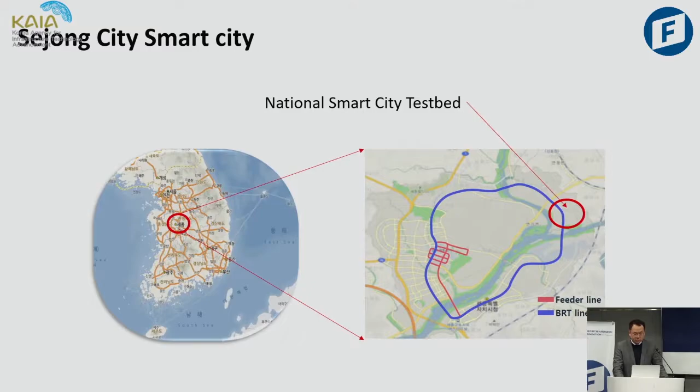And the National Smart City Testbed, you can see on the right figure, it's just one district, marked in the circle. This area is where we're going to build a new city. The city will look like this.

The total project cost will be around $30 billion, and the construction period from next year will be about 5 years. We're going to start operation from the year 2021 to 2036, and the business will be done by the O1 consortium, led by LGCNS.

In this area, we're going to propose 5 mobility services. The first is personal mobility, using electric kickboards and bike systems. Then we will introduce shared mobility, autonomous shuttles, and demand responsive transits. One more is smart parking.

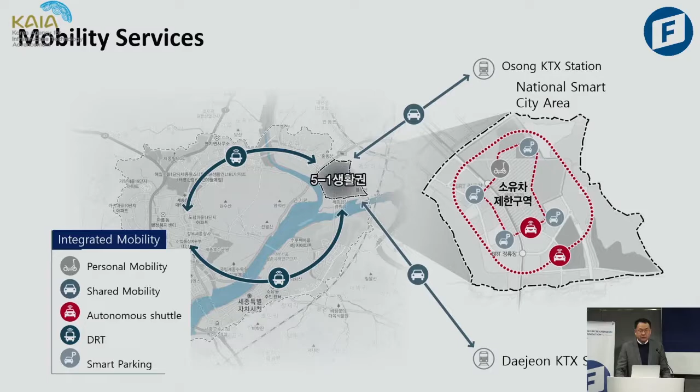In the 5-1 district, this is the smart city testbed area. Based on this area, we're going to plan the city transportation systems, and later we're going to expand the experiment to the whole Sejong City.

At the core of our effort, we have O1 Link. This is implementation of the MaaS concept - I think European people are very familiar with this, mobility as a service. Using just one single application like O1 Link, you can reserve, pay, and plan your trips. This will provide multimodal services to everybody, from the 5-1 testbed locations.

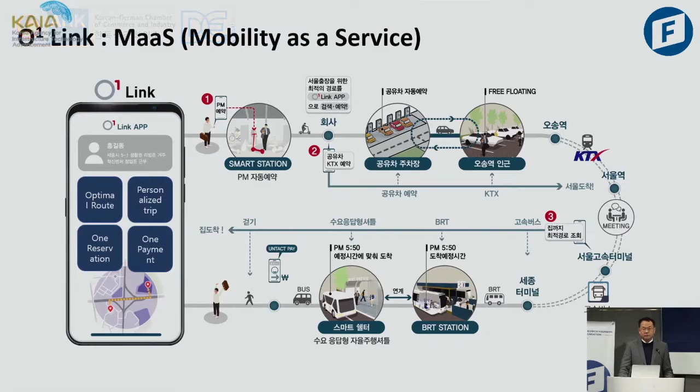And one good thing is that this O1 Link, we're going to open this platform to everybody. Meaning that if we are running a business and want to do more mobility services, you can also use O1 Link so you can join our network.

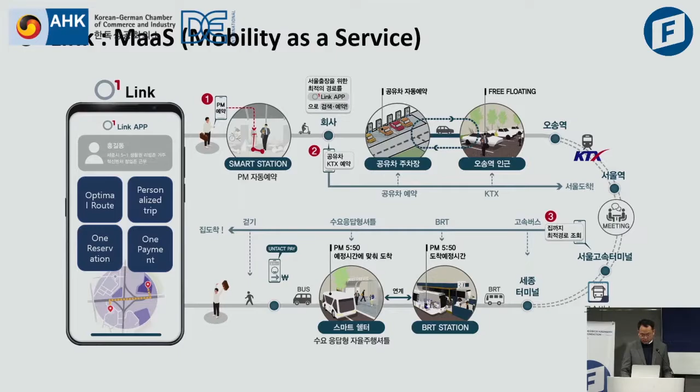Under the O1 Link apps, we're going to build the O1 Mobility Brain. This is kind of a system that optimizes transportation and mobilities using AI, cloud, and big data. I think this O1 Mobility Brain is the core concept of O1 Link and this smart city.

So we're going to implement a mobility simulator to find the optimal travel, and also we're going to predict future demand and future traffic, and provide these services to the people.

Using O1 Link, you can plan your intra-city travel using the 5 mobility services, and also these services will be combined and integrated with the existing services in Sejong City, like the BRT, bus rapid transit, bus systems, and taxis.

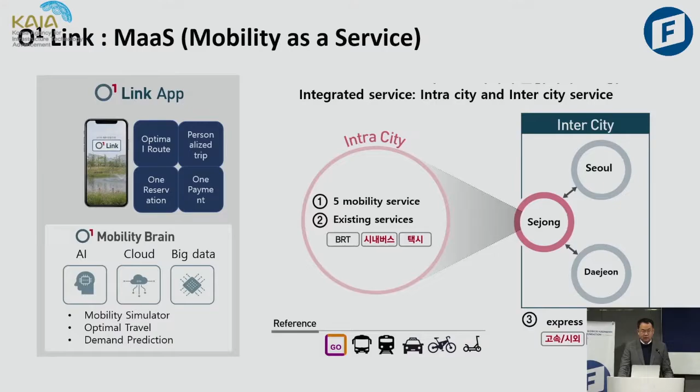And also this will support intercity travel. So if you want to go to distant cities like Seoul and Daejeon, you can still use O1 Link. Just one click and one app, and you can reserve everything.

And for personal mobility, we already have some personal mobility operated - we have bikes, kickboards, and micro mobilities. To improve the safety of the micro mobilities, we're going to build a personal mobility roadway, separated from the pedestrian way, where bikes and kickboards can be used.

And for convenience, we're going to use a wireless charging system, and we hope that all the energies for the electric bike and electric kickboard can be provided by solar energy. What we aim for is that 40% of the total energy demand inside this testbed city can be provided by solar energy.

And to connect to the vicinity area - actually in South Korea, Uber-like service is prohibited, it's illegal. So we want to have a slightly different type of shared mobility. We're going to use rental car services.

Around this area, we have 5,000 rental cars available. Using these rental cars, we're going to connect them with O1 Link, and then the people living in this testbed city can go to the vicinity area using these rental services.

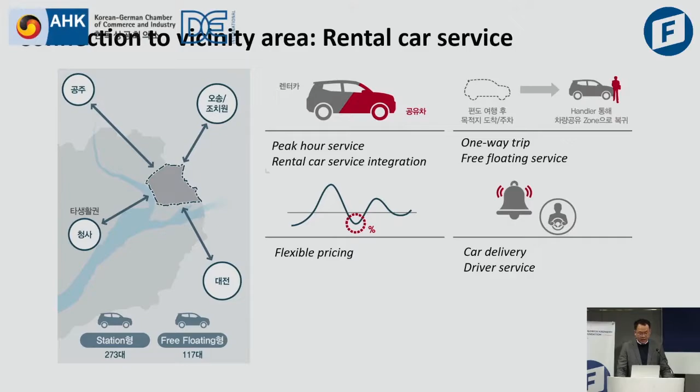And also we're going to have more services like car delivery and driver services, and we are making flexible pricing strategies. We have two types of these services: the station type, meaning you can go to the station and get these services, and the free floating type, meaning you have to find the vehicles using the O1 Link app, then you can leave your vehicle anywhere, and the handler will handle it.

And there is one more thing: the autonomous shuttle services. Inside this area, we are planning two autonomous-only lanes, and around these lanes we're going to first run the shuttle services.

This area will be connected by the C-ITS services from the national government, using infrastructure-to-vehicle communications so vehicles can get more information from the infrastructure. Along this roadway, we're going to install many sensors.

We are designing a smart pole, which is a kind of sensor combination using CCTV cameras, and LiDAR or radar if needed. That information will be delivered to the driver or vehicle so they can avoid dangerous situations like collisions.

For security purposes, we're going to use blockchain-based security. We will also make a smart shelter bus station, which is an O1-link accessible point. So if you just go to these bus stations, even without any apps, you can reserve and get the service.

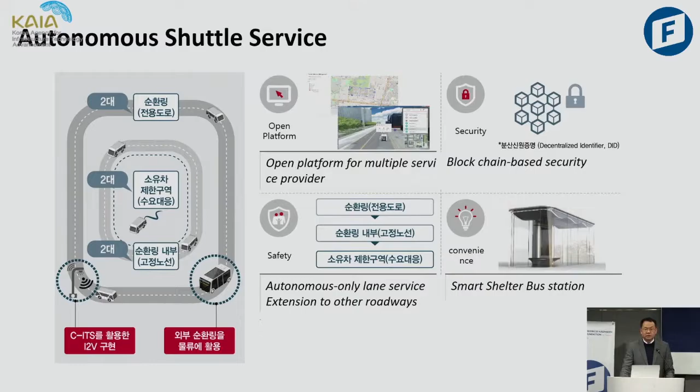These autonomous-only lane services will later be extended to the whole city, because safety is not yet guaranteed. We're going to do more experiments one by one, and once we have enough reliability, we'll extend these services to other roadways.

We think one of the killer applications of mobility services is demand responsive transit. This means you call the transit service, it picks you up, and delivers you to the location you want.

We have two types of services: fixed stop-based and floating stop-based. With fixed stop services, you have to go to a fixed stop location. But with floating stop-based services, you can call from anywhere and be dropped anywhere.

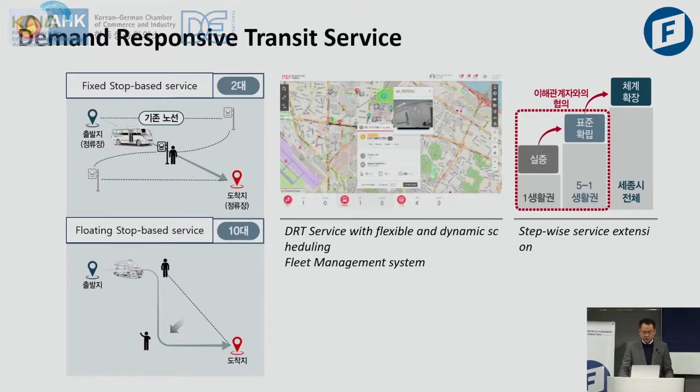Initially we are starting with 12 vehicles, but later, after analyzing demand and mobility situations, we're going to increase this number so we can provide services to the whole of Sejong City.

The last one is the mobility hub station. These will be located around the city. You can see the red dots and blue dots are the locations for the O1 mobility hub stations.

If you just go to these mobility hub stations, you can get every type of service, like bikes, PM, shared mobility, DRT, EV charging, more convenience facilities, and also robot parking.

This kind of hub station will be installed in parking facilities, and some of these parking facilities will be underground.

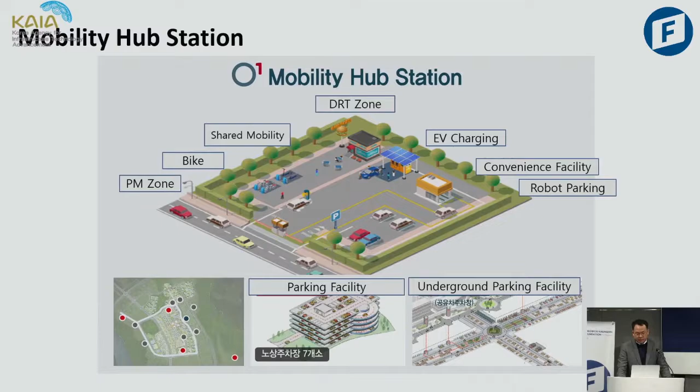Up to now, we are just starting with 5 mobility services, but later we're going to extend these to more advanced future mobility services, like autonomous taxis, drone taxis, UAM, and unmanned trams. These will also be tested in Sejong City later.

So up to now, I have shown you some services we are planning for the Sejong Smart City Testbed. But the question is: this kind of service is just like what every city is talking about. So what is the difference, and what is the implementation strategy?

To look at this, we have to rethink what smart city means. People talk about IT, data, and information as the smart thing, but I do not agree with that idea. I think smart means better decision-making or optimization. But what about the city?

City is what? There might be different understandings of the city—living, lifestyle, history can all be included. But from a management or engineering concept, I define the city as a system with many infrastructures. So what is smart city to engineers? I think it's a decision-making system for urban infrastructure systems.

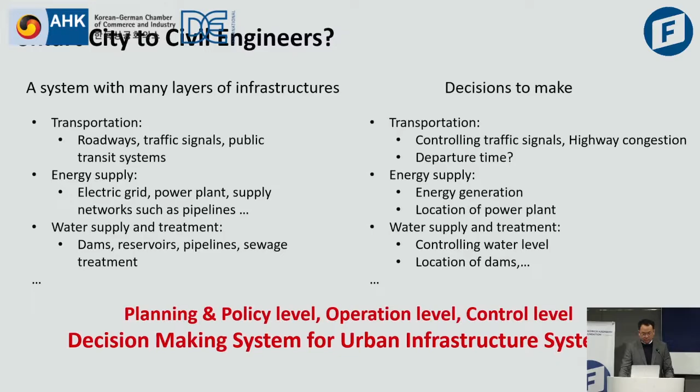So we have to make a better decision for the planning level, the policy level, the operation level, and at the very detailed control level. So this is my understanding on the smart city.

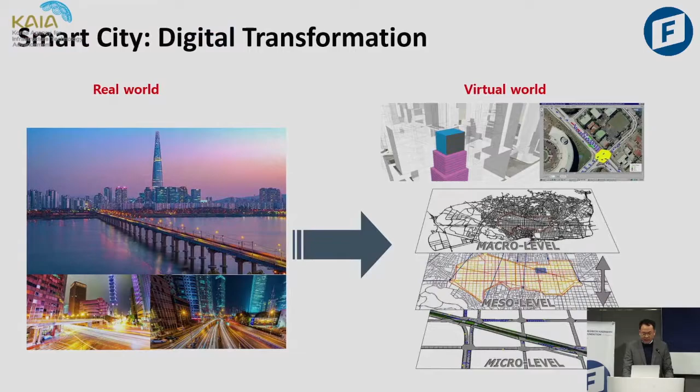To implement this idea, I think that we have to build a digital twin. We want to make a copy of the digital version of our city. So from the real world, we have to make maps and we have to make some behavior models. But the problem is how we can implement the digital twin?

To make the digital twin, before we go into the implementation, we have to talk about strategy. What kind of strategy we're going to use for infrastructure management? Up to now, infrastructure management strategies have evolved from reactive management to proactive and predictive. In the future, automated maintenance will be the future theme. But right now, what you have to focus on is predictive maintenance or predictive management.

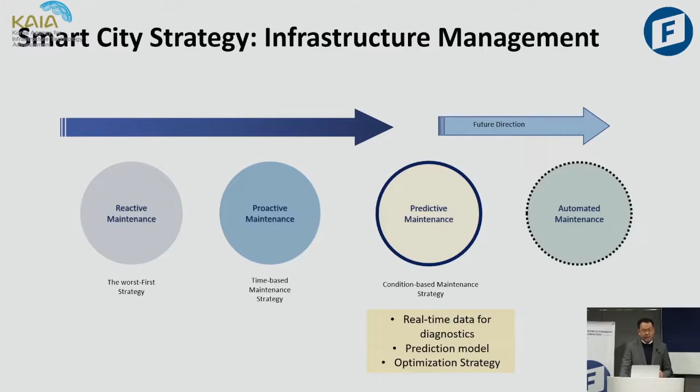In the predictive management strategy, we can use real-time data for diagnostics of our infrastructure system. We have to know the exact state of our infrastructures or our services. Then we have to build some prediction model. Based on the prediction model and diagnostics, we have to set up an optimization strategy to provide the best service. To implement those kinds of ideas, we're going to design the mobility brain.

Up to now, so many digital twins are focusing on building the data hub. But the smart city is not just a data hub. So how can we make a really good decision using this kind of data? We think that we need more functions and procedures.

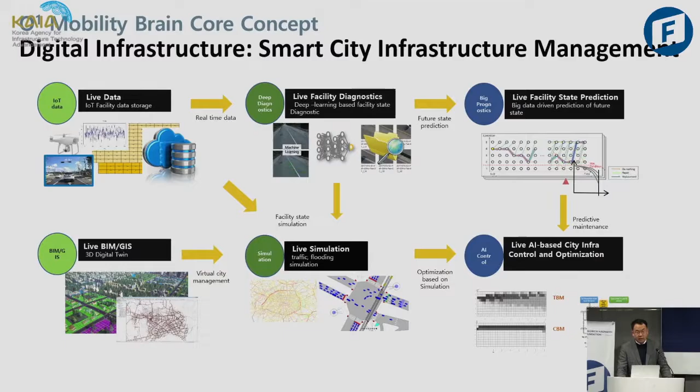So I think that live simulation will be the core of this digital twin concept. Using these prediction technologies and the data-driven approaches, we have to combine those together to get the optimal control and optimizations. To implement this kind of idea, we can think about some examples.

So we're going to start from the sensing. In these O1 cities, I think we're going to make some kind of surveillance system of the traffic. You can see that we want to track all the vehicles inside the cities, not just the vehicle movement. So we want to extract the origin and destination locations of all vehicles.

And then we're going to make some kind of surveillance for the pedestrians. We want to know the crossing intention of the pedestrian so that we can avoid collisions. So this kind of system is the basic one.

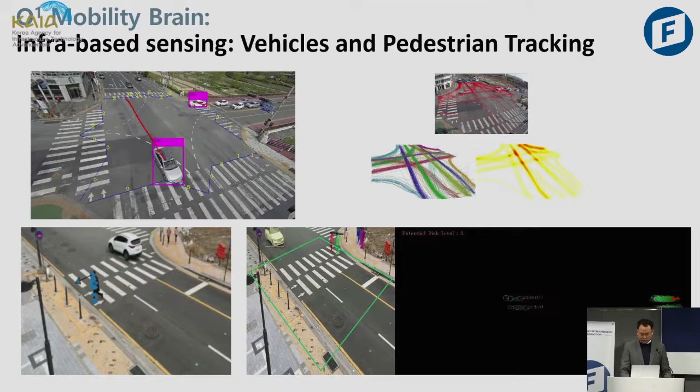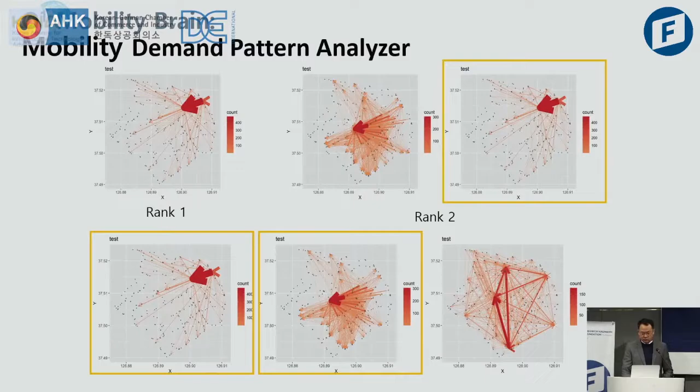Using this surveillance system, we want to get the whole mobility data. And using that kind of information, we can implement some mobility demand pattern analyzers. We can stratify some demand into several ranks, so we can extract some very crucial demand for the services. This information will be used for the DRT route services.

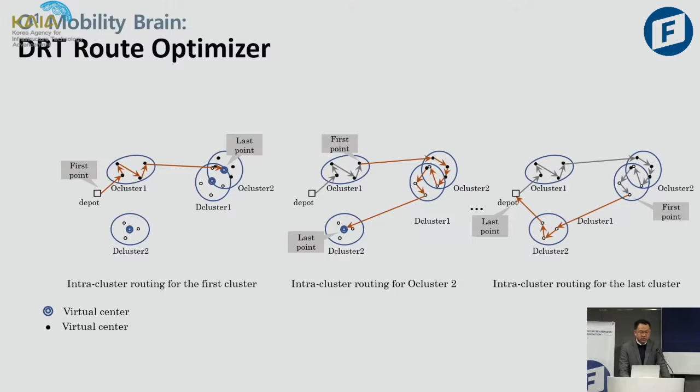And this information, we are using the DRT route optimizers. So in real time, we are observing people's movement and traffic data, and then we make real-time route optimizers. Also, at the core of the digital twin, we want to build a cloud-based mobility simulator.

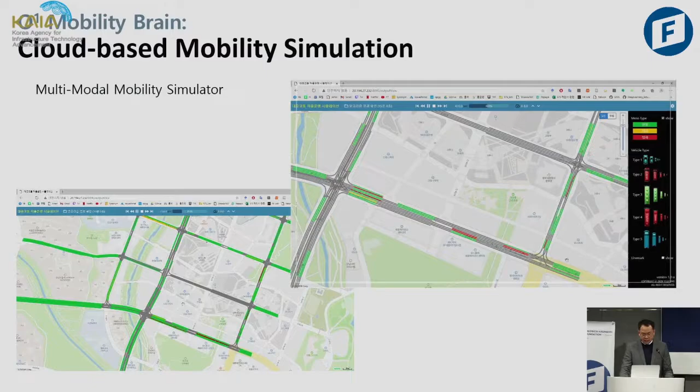Now this is the example of Sejong City. You can see we are already building some HD maps, high definition maps, for the autonomous vehicles in Sejong City, and we are making some simulations.

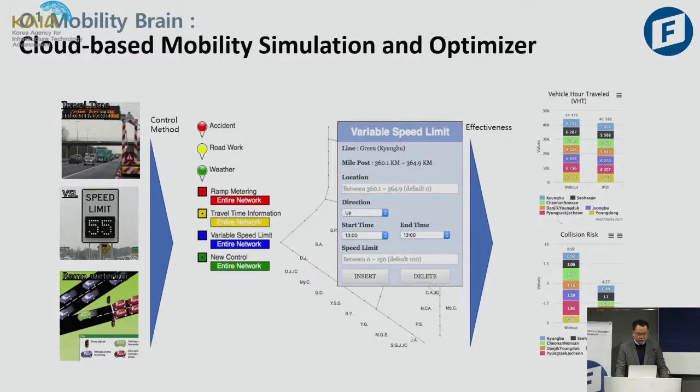Using these simulations, we can make a much better route optimized result. This kind of mobility engine can predict and control the infrastructure system. For example, if we want to set variable speed limits, and there's an accident, road work, or weather situation, the simulator will give the best result for what action to take for control of the roadway.

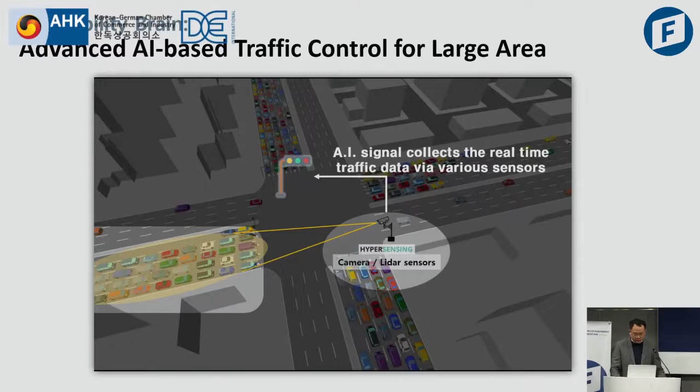Next is the advanced AI traffic control for larger areas. Using the surveillance system, we are observing all the vehicles, and the AI optimizer is calculating the best option for signal control.

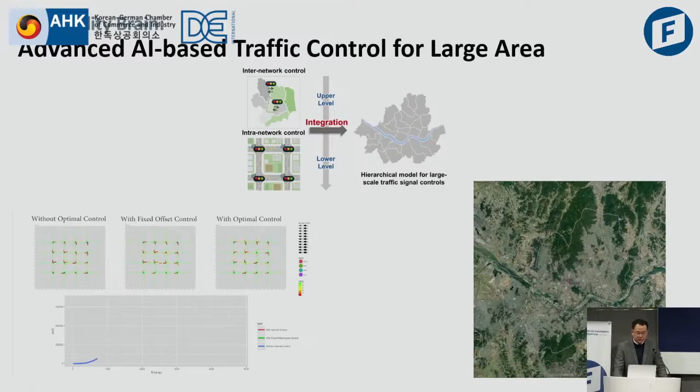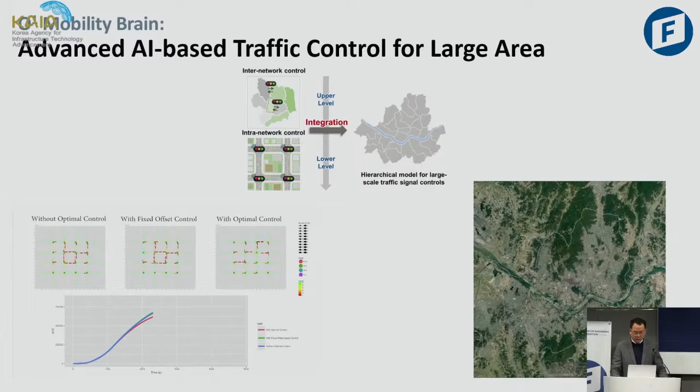But this kind of signal control will not just be a simple single intersection signal control. We're going to use a little bit higher level strategy, the bi-level strategy, meaning we divide the city networks into several sub-networks. For these sub-networks, we optimize the interflow between sub-networks and optimize the intra-network signals.

As you can see, we can reduce huge congestion using AI and this approach. We think we can reduce the very severe congestion in metropolitan areas using this approach.

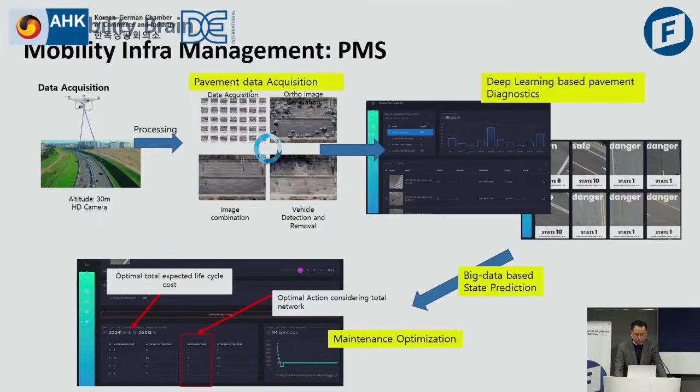The computer will know whether the road area is dangerous or not. If there are potholes or cracks or any hazard to vehicles, it will detect it. Later, using this big data, we can do state prediction and give maintenance optimization, meaning this will be implemented as an order for the maintenance workers.

Okay, this is the end of my presentation. I think Sejong City is a citywide living lab, so we're going to do a lot of experiments here. What I pursue is an open platform for business, so everybody who wants to join, I hope you can join this. You can just send me emails, and this is open for all types of collaboration.

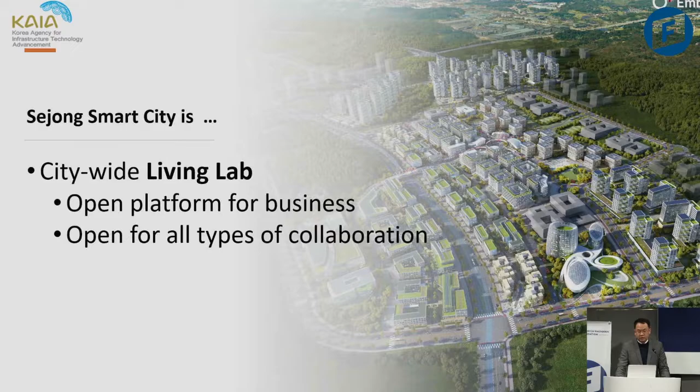We're going to build a smart city research center inside this region, and some universities and research institutes will join this project. This can be a really good opportunity for Korea and Germany collaboration for the smart city. Dankeschön.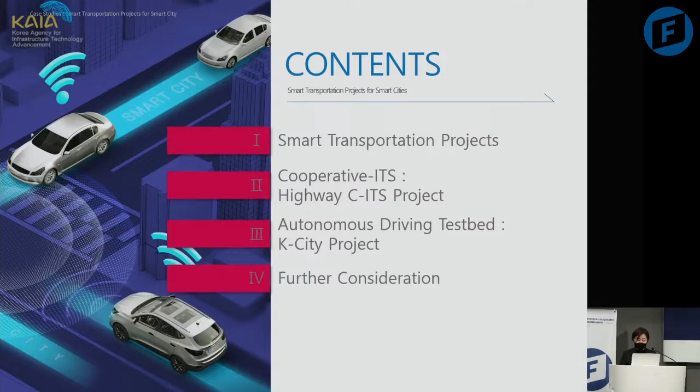Here is a brief summary of my presentation. First, I would discuss several types of smart transportation projects. Second, I would like to introduce one C-ITS project which I already completed as a project manager. Next comes the K-City project, which is a testbed to evaluate automated car scenarios. Finally, I would like to conclude with further considerations.

As for the smart transportation project, I'd like to discuss the key factors between several types of projects. Here are the projects I wanted to introduce today. Those are the relevant projects which are already done or still ongoing.

So firstly, look at the left side of this project: the K-City Testbed, already completed in 2018, and the Highway C-ITS project, done in 2019. And we are implementing the Daegu Testbed in 2020.

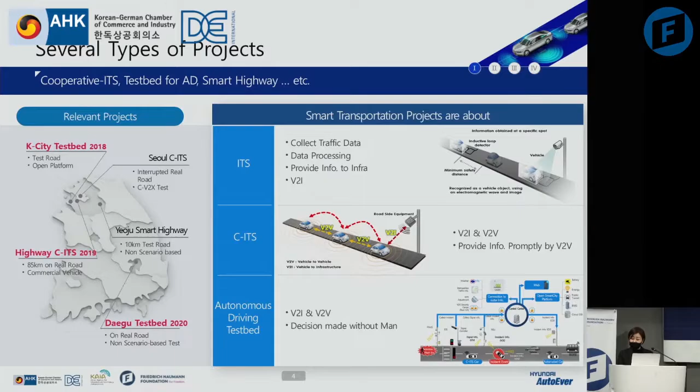So let's talk about what the smart transportation project is about. You're already aware of the ITS project, which has already been implemented over the last 20 years. So what is the difference between ITS and C-ITS? The key factor is V2V, vehicle-to-vehicle communication. And also the last thing is the autonomous driving testbed, which is decision made without a driver.

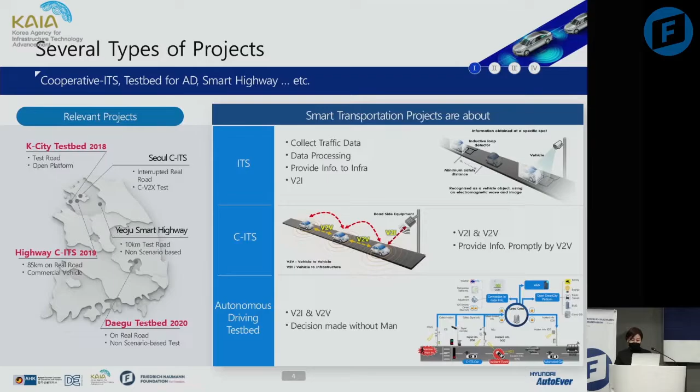Now I'd like to show that first case study, the highway CITS test project. This project was led by KEC, Korea Expressway Corporation.

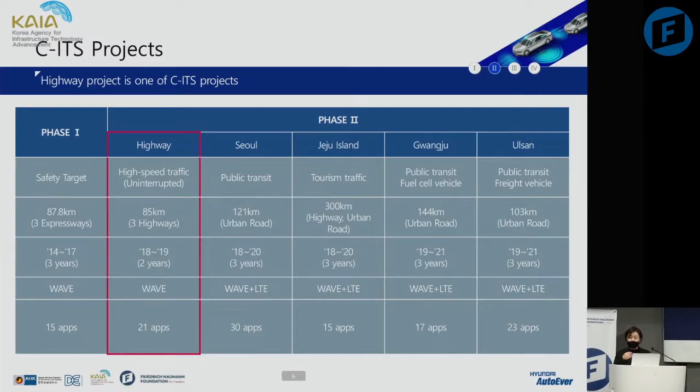Here are similar projects which are already done or still ongoing. First, we categorized those CITS projects into 2 phases. The first phase is Sejong CITS project, and the second is highway CITS project which was already done by Hyundai. Seoul, Jeju, Gwangju and Ulsan, the 4 metropolitan cities, are implementing this CITS project now and it's still ongoing. My company and my project team are joining that Gwangju project as well.

As project manager, I have completed this project over 1 year. Let me introduce a brief summary of this project. Project scope is 85.4 kilometers total length over a 1 year period.

It also adopted WAVE network to communicate with 90 RSU and 700 OBU. It has 17 incident detection systems to give dangerous information to drivers, as well as a parking information system and a center system with hardware and software.

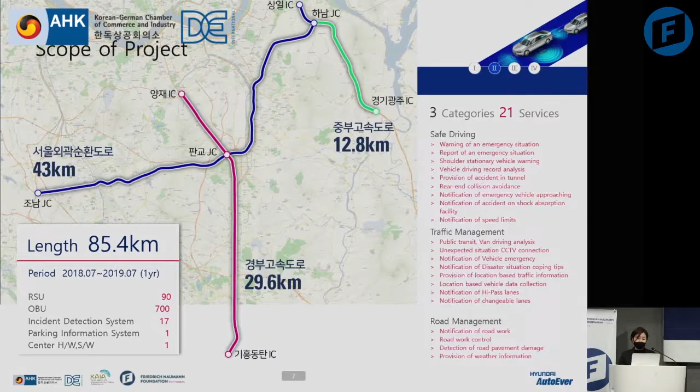This project specially collaborated and combined 2 different systems: the previous ITS legacy system in KEC, and our new system. It was really hard work, but we made it.

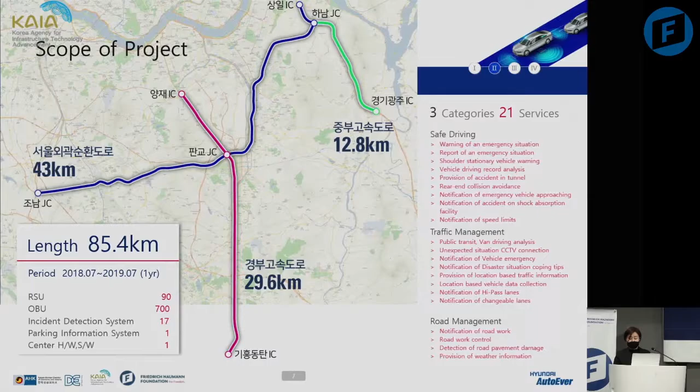This is a brief summary of our services. There are 21 services in 3 categories: safety, traffic management, and road management. The red color means critical information for driving and safety. We implemented 9 services first, plus green and blue services.

It doesn't look like a mandatory service. However, if you get information on road conditions and different event cases, it helps your driving.

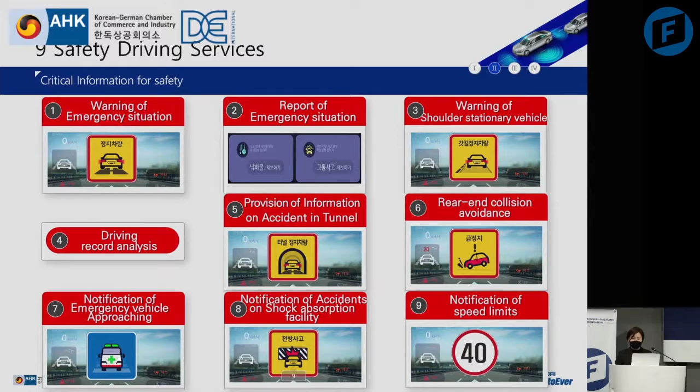I will not go into detail on these 9 safety driving services, since you already know those. There are also 8 traffic management services and 4 road management services as well.

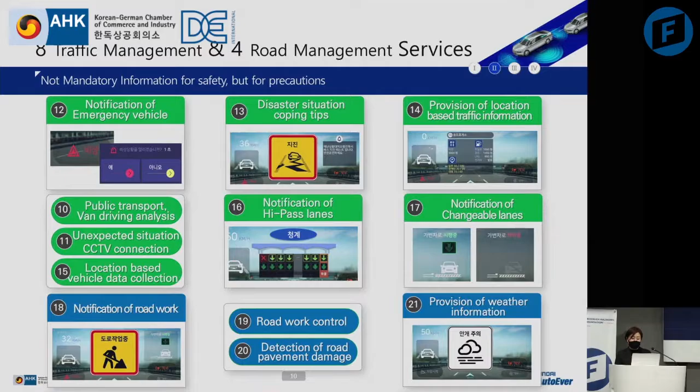We especially have 4 different types of tunnels and 3 different types of high-pass toll gates, and a lot of different events were happening on this road.

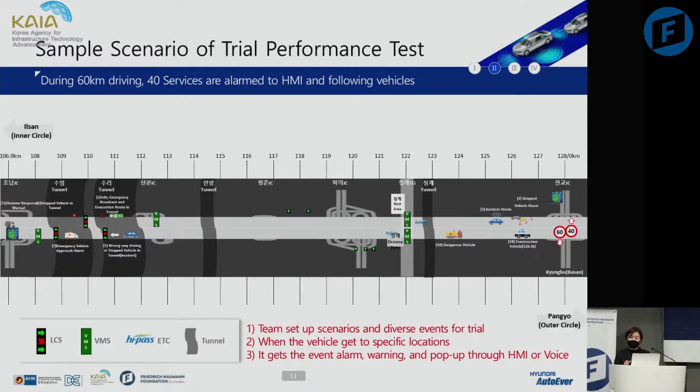This is a sample scenario of the trial performance test. After the project, our team set up scenarios and diverse events for trial. When the vehicle reaches specific locations, it gets event alarms, warnings, and pop-up messages through HMI and voice.

Here are the expectations for this project. In terms of accident prevention, we can expect drivers' compliance to increase by almost 50% compared to without information. Accident prevention could be expected to yield a benefit of $0.8 million.

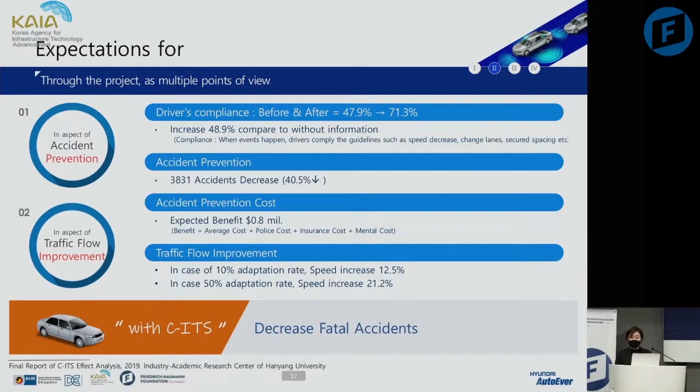In terms of traffic flow improvement, with just a 10% adaptation rate, speed increases 12%, and with a 50% adaptation rate, we can get a speed increase of almost over 20%.

Now I would like to show the other project, totally related to autonomous driving. The K-City project is a testbed project to evaluate automated vehicles based on systematic scenarios. Whoever wants to test their automated car can simply make their own scenario to test performance.

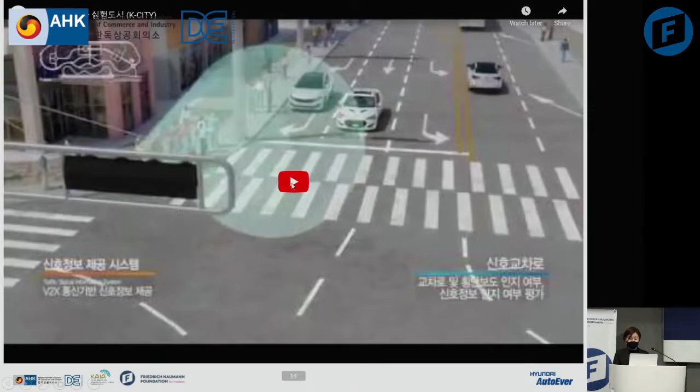Let me show you a simple video clip introducing that system.

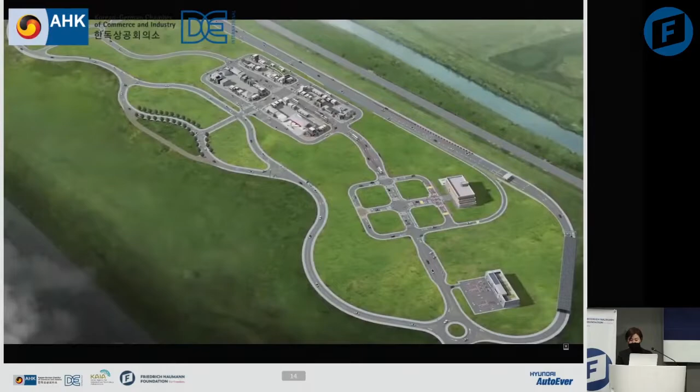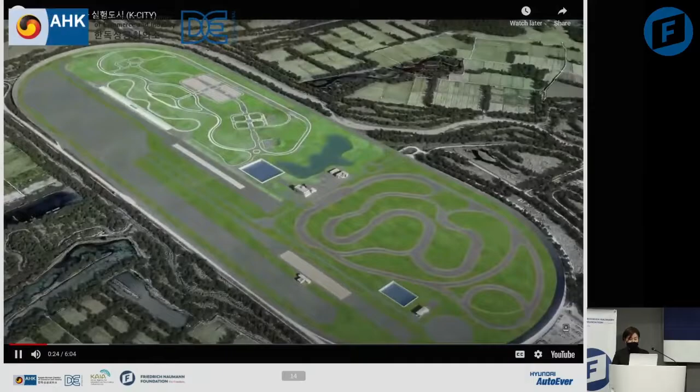This is the physical area implementing this system. This site has community road, CBD road, as well as exclusive motorway, outer road, and auto parking area.

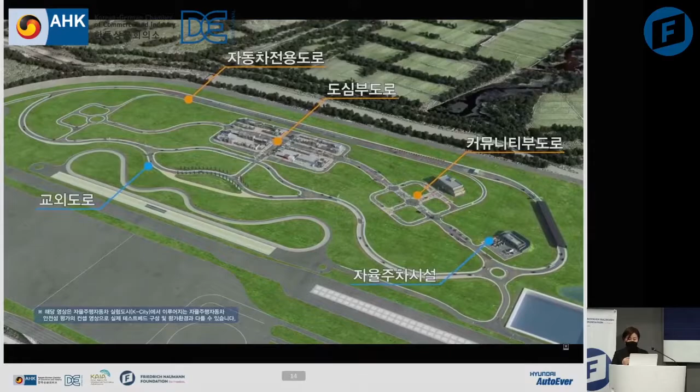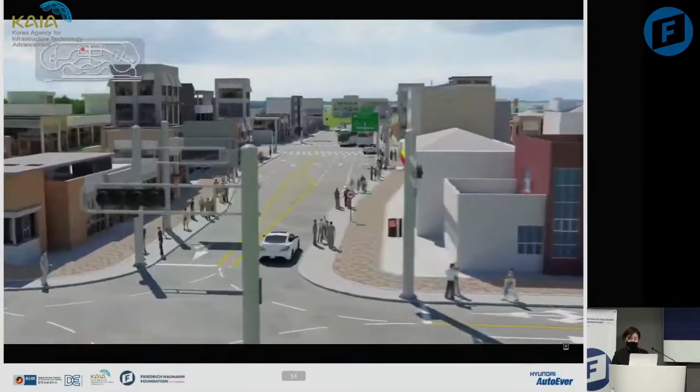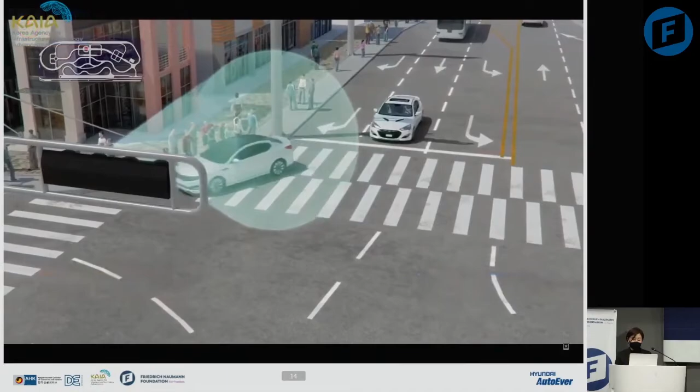Now you can see the simple subsystems that can be tested during the course drive. First, you can combine this signal intersection information and test the conflict effect with incidents.

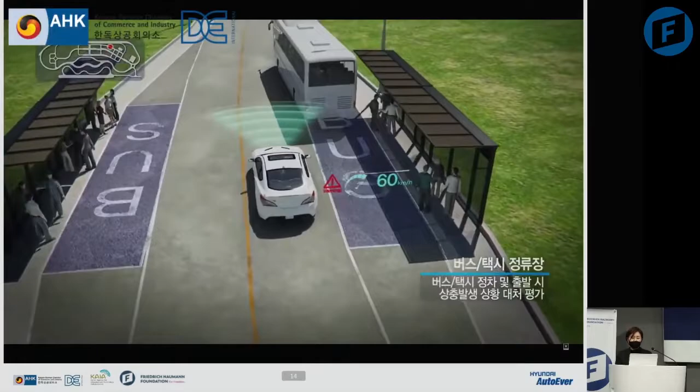This is the bus lane, so autonomous cars could be tested for that kind of conflict as well. Here is the CBD road, which has a shadow area with high buildings.

Now this is a special zone for pedestrians as well as children, so you can test the conflict between pedestrians and small kids.

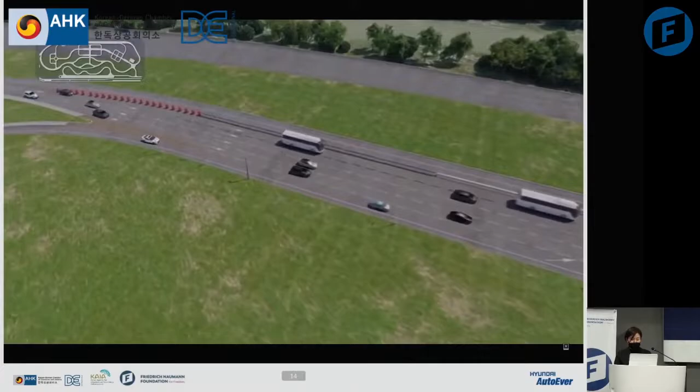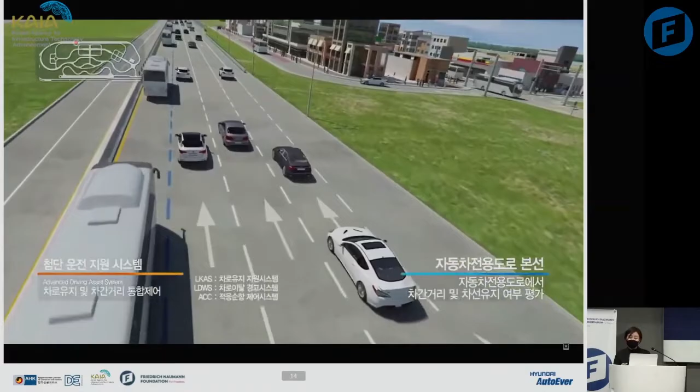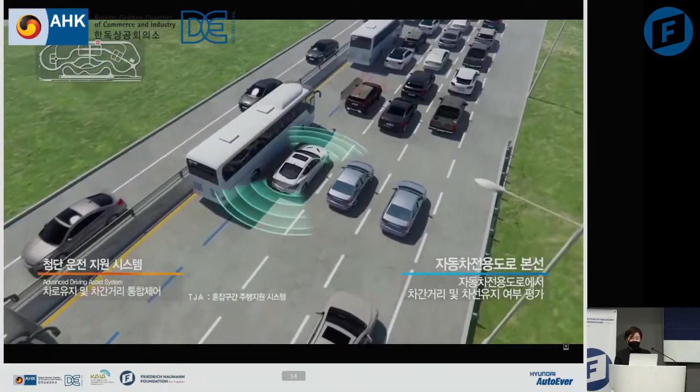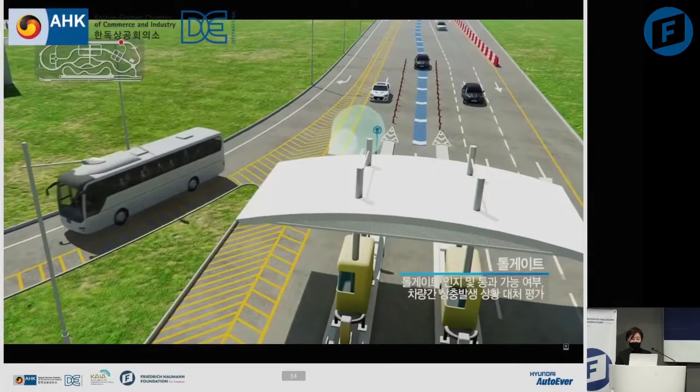This zone is the exclusive motorway course, so you can test the advanced driving assist system, ADAS. You can also test ACC, and also test this high-pass toll gate.

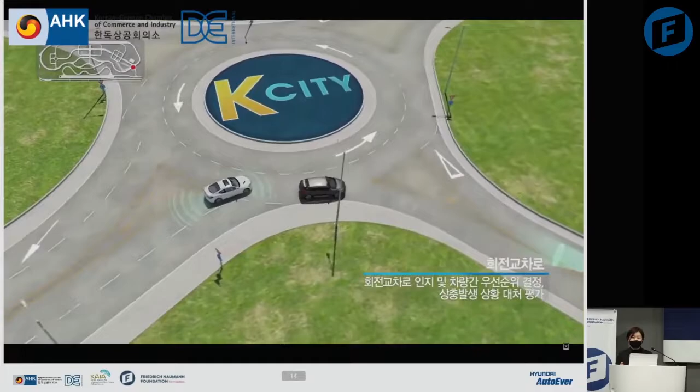Here is a simple mimic of an outer road, covered with street trees, and also a roundabout. Mostly in this case we have lots of conflict between cars. And also this is a tunnel.

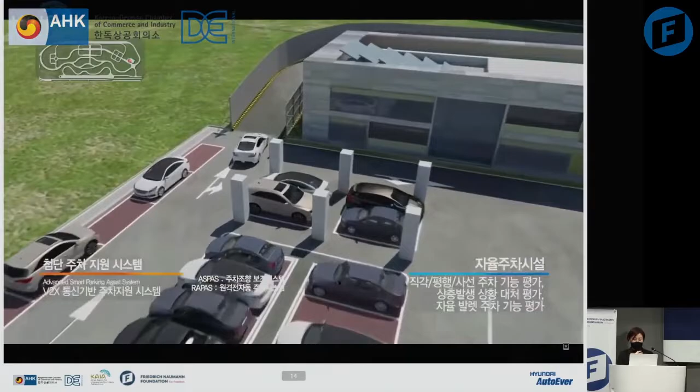And almost lastly, there's the advanced smart parking assist system, so you can assess that kind of system as well.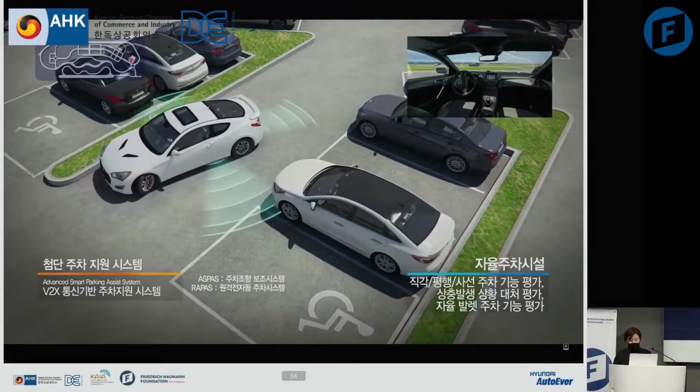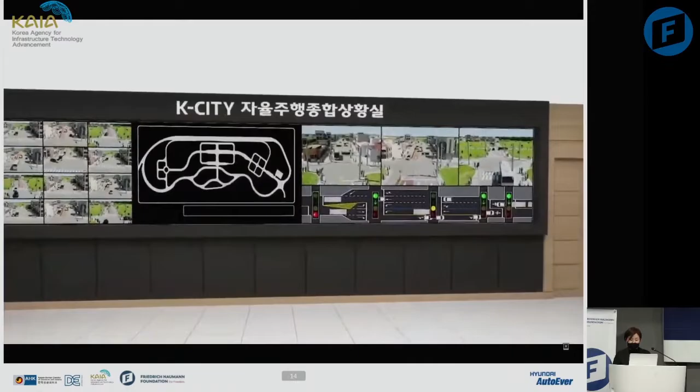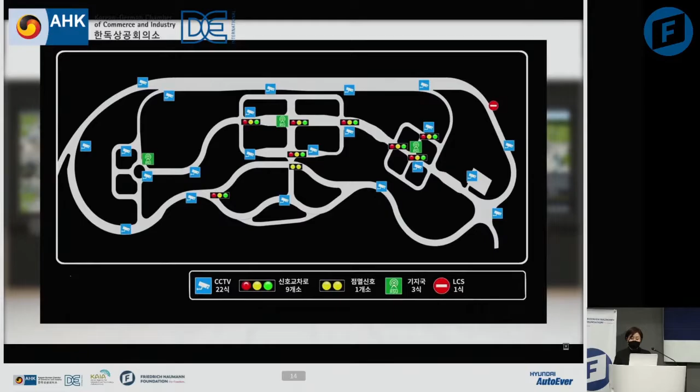And also this system has the control center as well, CCTV and traffic signal, and also the RSU and LCS kind of systems.

Let's stop this video. Let me show you a simple explanation for that.

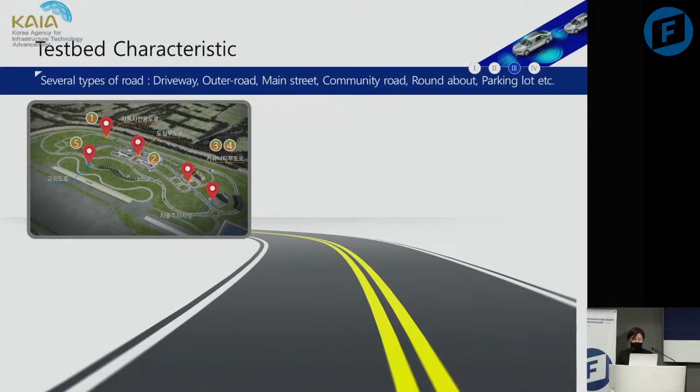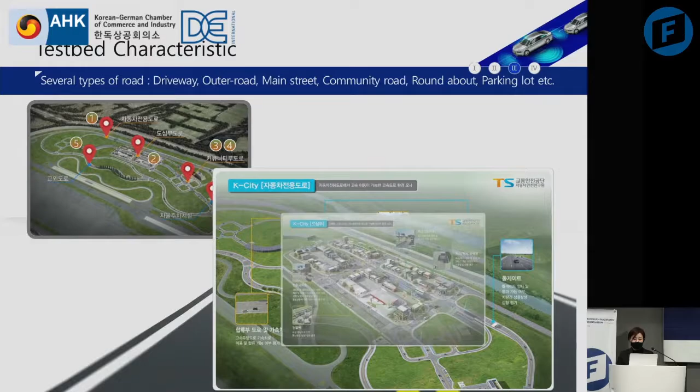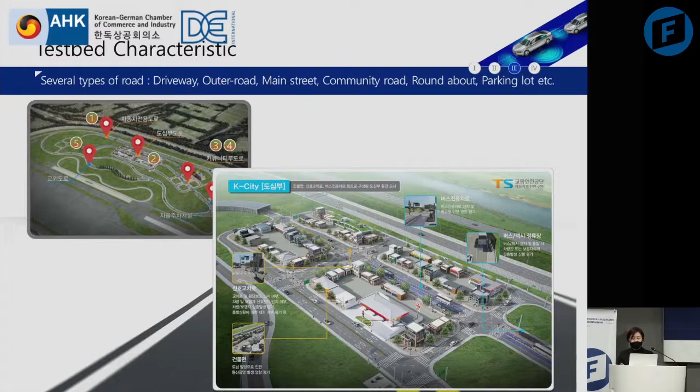This shows the features of the physical site design. This course has diverse road types as well as specific situations. This is exclusive motorway, and those sections are CBD area, which can be tested for the signal area, bus lane, bus taxi stops and so on.

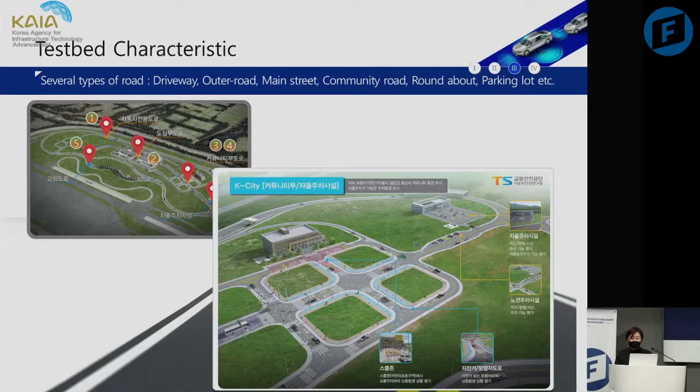And this is community road as well. You can simply get the events in the school zone and pedestrian and bicycle and road parking system.

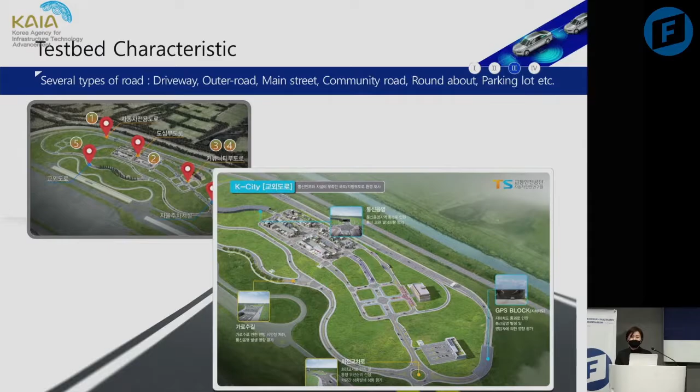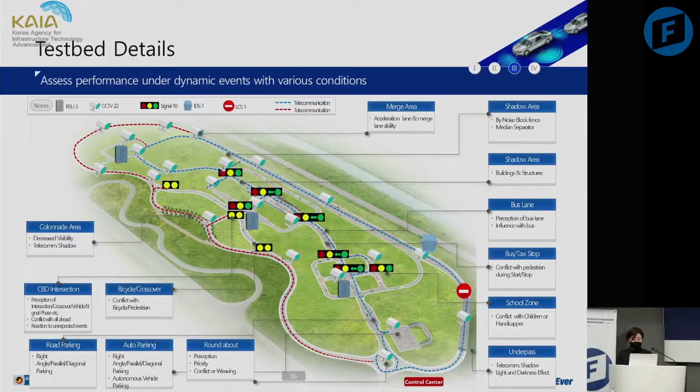Also, this is outer road, which can have multiple shadow areas, because you can test the telecommunication network service quality as well. This is the testbed details. You can assess performance under dynamic events with various conditions. So we already considered and reviewed all the things by video.

And this is further consideration. Hopefully, we should follow the standards and technologies. Those things should be arranged, and we should follow those things, especially for the standard, for specific road conditions, and also we need to develop diverse test assessment and scenarios as well.

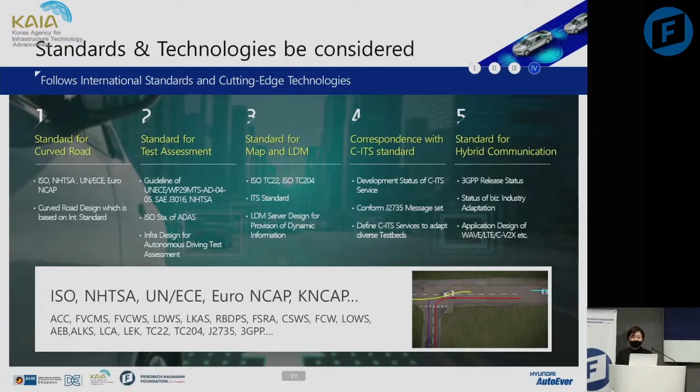And also we should follow some standard map, such as LDM. And also we need to have correspondence with C-ITS standard as well. Also, we have to consider hybrid communication networks.

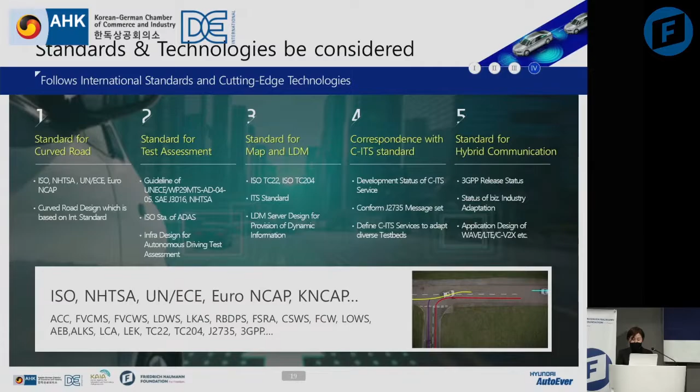So that's all for today. Thank you for your consideration and your dedication. Thank you.